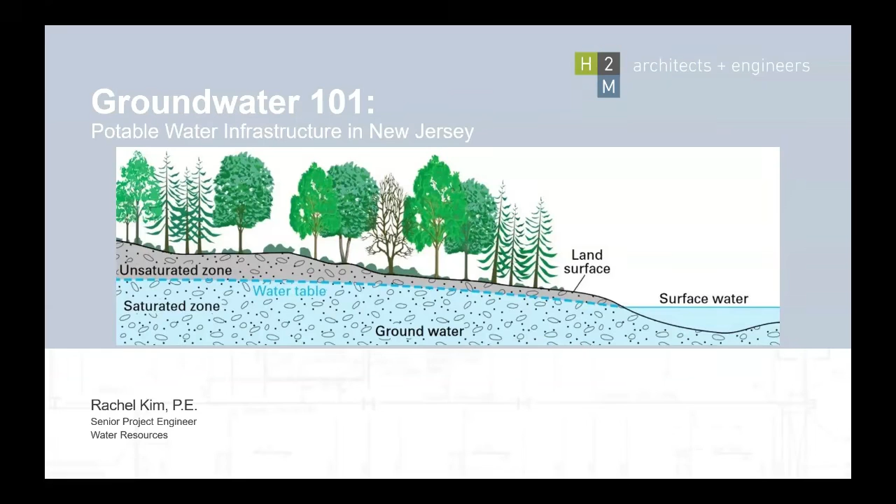So today, the topic I'll be sharing on is Groundwater 101, and we'll be diving into potable water infrastructure specific to New Jersey. And if any questions arise, please feel free to stop me as you need. Yeah, we typically do a Q&A right after you are done. Okay, yeah. That's great too.

Okay. So just a little bit about myself. I went to Cornell, where I got my BS in civil and environmental engineering with minors in engineering management and architecture. Like Joe mentioned, I actually did start off as an architecture major. That's what this little dragon on the bottom of the screen is.

The freshman architects build a dragon and then march it down the main road through campus the Friday before spring break. And then we brought it to the arts quad where we set it on fire and danced around it. This included the architecture upperclassmen who are usually wearing weird little costumes that they make. And then the engineers retaliate by building a phoenix to battle the dragon.

And this all originates back to the early 1900s when there was a student who thought that there should be a College of Architecture day, and he led the students around campus with a model dragon, and the lore was that it was partly inspired by St. Patrick driving the snakes out of Ireland, and this is still an active tradition on campus. It happened earlier this year in March, and I'm sure they'll do it again next semester. I don't think they set the dragon on fire anymore, probably because of safety stuff.

Pretty weird tradition. But like Joe mentioned, it turns out architecture really wasn't for me, and I ended up transferring to the engineering school my sophomore year. So throughout college, I interned with a geotechnical contracting firm called Moretrench, and I ultimately went to work there full-time after graduating. I was with that firm for about 12 years, working in deep foundations, ground improvement, and construction dewatering design.

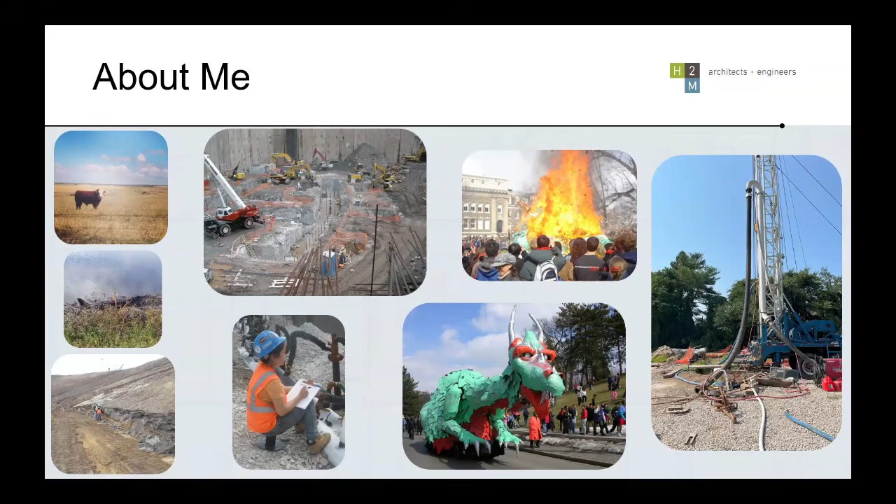So the photo on the right is the only kind of current photo. It's actually pretty recent. It's from a potable water well installation for the South Huntington Water District in Long Island from last summer.

So just a little bit more about H2M. It's an architecture and engineering consulting firm. Like Joe mentioned, I work in our Parsippany office. The water resources team in our office is now almost 20 people at this point, which is pretty exciting because when I started in 2020, there were only 6 of us.

We're full services, so we offer everything that you need to design a structure because we have many different expertise in-house that can help with everything from land use constraints and permitting, HVAC systems, plumbing for a building. We have structural engineers, electrical engineers. We do drinking water and wastewater. We have surveyors, landscape architects. We have environmental teams and then forensic teams that evaluate structures for asbestos or do fire investigations.

We have construction inspectors who we deploy once projects are actually in the construction stages. And it's great for me because I get to learn a lot from these various departments, but then conveniently I can pass off all of the tasks that I don't have the skill set to be able to perform.

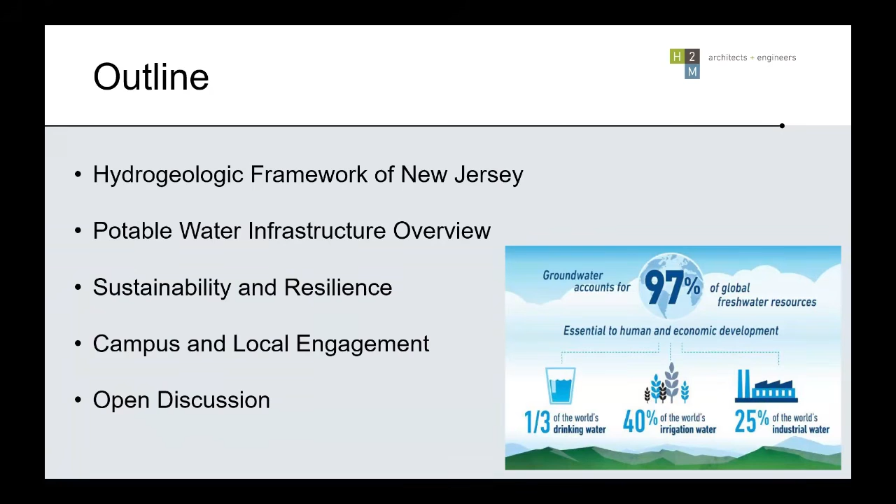So I'm sure you're all familiar with the water cycle. I feel like this general concept is introduced to us all in grammar school, but we'll dive a little bit deeper without getting too cerebral unless there's interest, I guess. But the basic concepts are extraction and recharge.

So we in civilization use wells and surface water as sources of water. Animals also drink from surface sources. Plants absorb water from the ground. And those are all kind of extraction points. And then for recharge, the primary source is typically precipitation. As water precipitates, it'll fill surface water bodies, percolate through the ground, and replenish aquifers.

What's an aquifer? An aquifer is just a naturally occurring underground layer of saturated permeable material. Permeability refers to a soil formation's ability to transmit water. So coarse sand and gravel aquifers tend to store and move the most water. Bedrock aquifers rely on fractures to transmit water and can be productive, but they do tend to have less capacity as compared to sand and gravel.

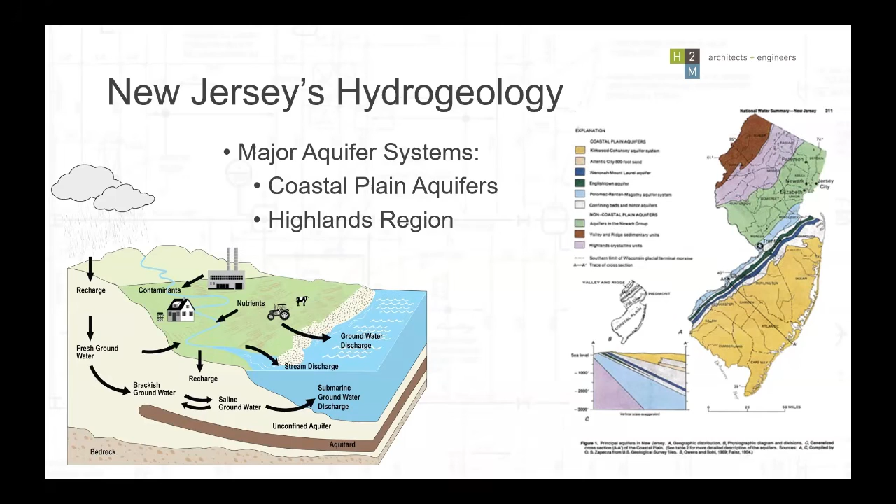And then areas without planting or forest cover also lose a lot more water to evaporation. So for example, I would think of wealthy neighborhoods where each parcel is kind of humongous and there's just a singular little McMansion in the middle, and then the rest of the property is just a giant lawn. The precipitation hitting those areas is recharging the area that the water is being extracted from, but it's evaporating a lot more quickly. For me, I think lawns are one of the worst things to have happen to the environment.

Next, there's aquifer storage, which is related to pore space. A high porosity aquifer has more potential storage. So if you think about coarser, looser soil layers with larger pore space between each granule, that's increased volume for water to occupy. If you have very dense soils that are well graded, so you have small grains filling in the space between big grains, you'll have less room for water to be moving freely through that pore space.

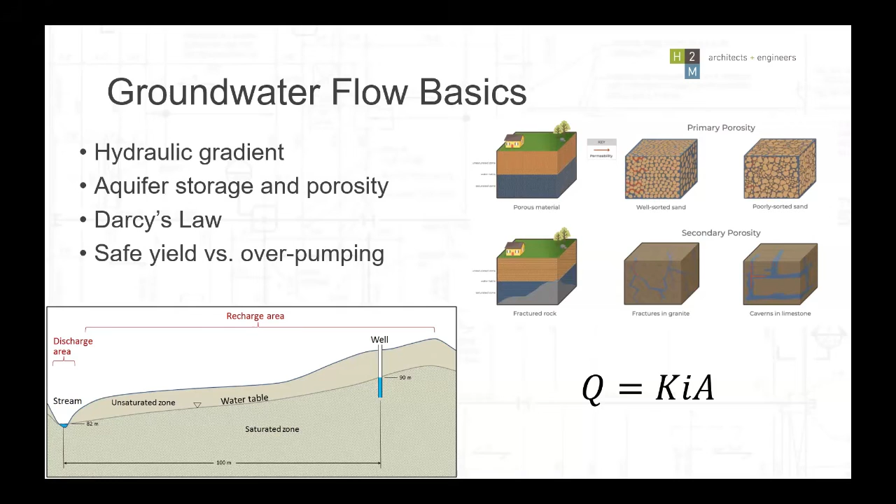Depending on water quality, there will be a level of treatment that's needed. Typically, at a minimum, we implement disinfection. That's usually done with chlorine. We have one client that still uses gaseous chlorine. Very interesting to me because it's so incredibly dangerous, but it's actually one of the most efficient ways to chlorinate and disinfect your water. You can also do UV disinfection. There's a few different methods.

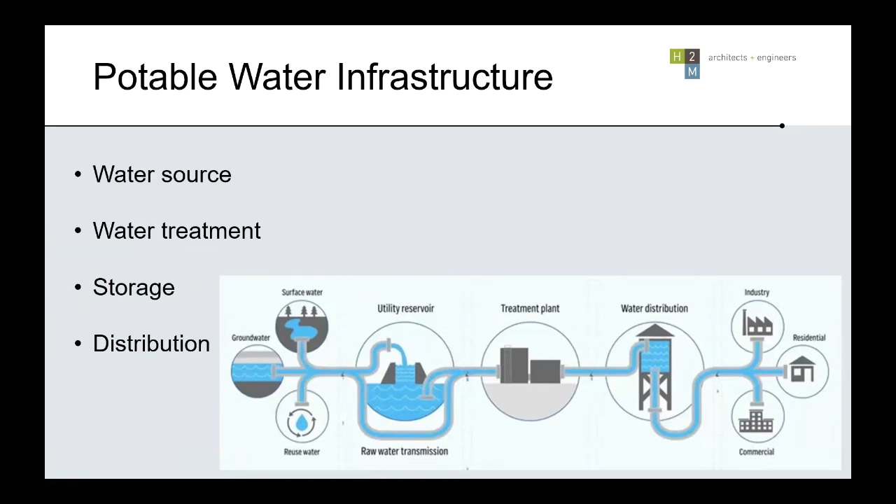We have new technologies that can test for these things. We're finding out about health effects of different exposures of contaminants we used to not understand before. And health authorities are beginning to regulate more and more treatment requirements to deem our water safe for public consumption.

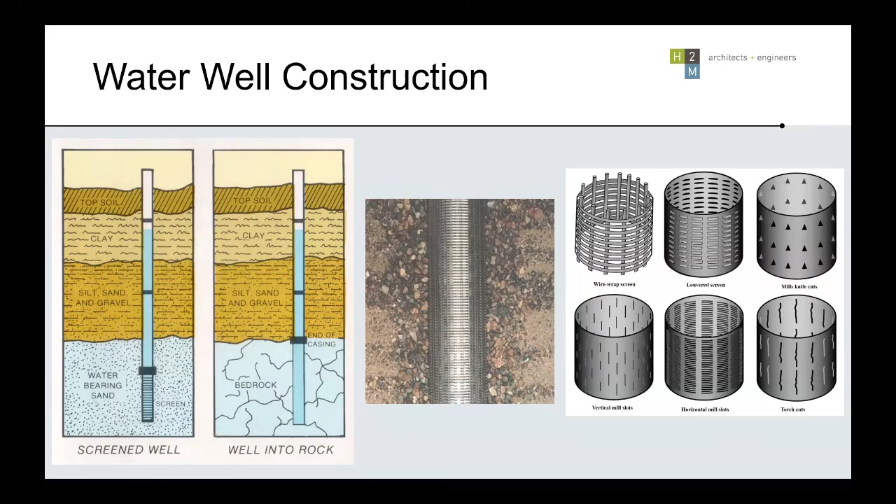The DEP actually regulates groundwater wells based on the density of wells in an area, as well as the aquifer capacity. They also take into consideration other environmental factors like sensitive habitats for animals, or things like proximity to wetlands, because you don't want to draw down the water so much that you're now negatively affecting the environment. And then if you happen to be a resident with a private well that's maybe on the shallower side, and then you end up surrounded by a bunch of larger municipal wells, the municipal wells might lower the water table enough that your private well runs dry.

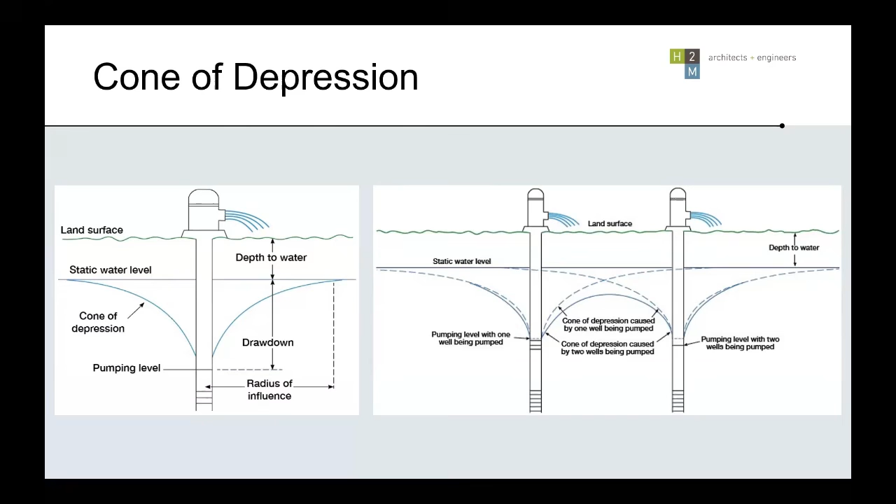And then a good segue from moving plumes into contamination and emerging issues. There are two main categories when it comes to drinking water contamination, at least from a regulatory standpoint. Primary contaminants are substances with direct negative health impacts and are subject to legally enforceable standards, which we call MCLs, or maximum contaminant levels, that are in place to protect public health.

And then secondary contaminants are non-enforceable aesthetic factors like taste and smell and color. These are, again, non-enforceable guidelines, but this is also the category that will generate the most customer complaints. So it's always in a water purveyor's best interest to address both. The primary contaminants they have to legally handle, and the secondary they should want to take care of so that they're not getting angry service calls all the time.

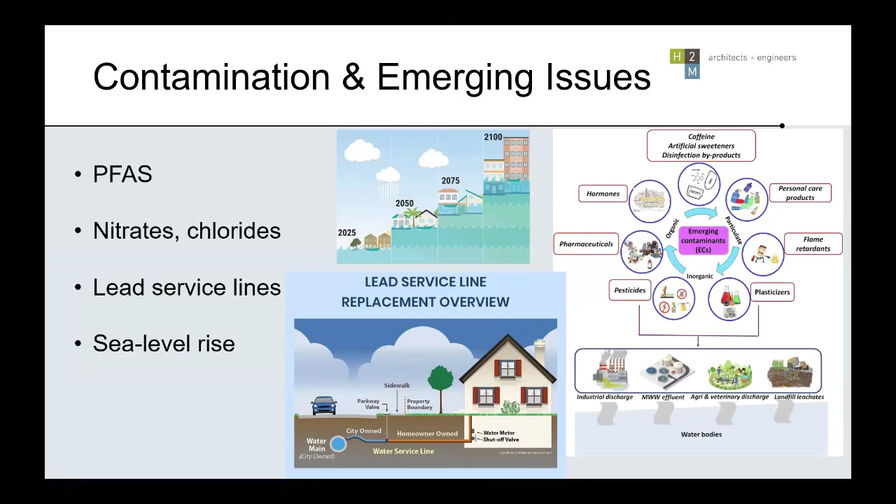So tying this back to sustainability and resiliency, there are a few different strategies to helping protect our most precious resource, and I'll share a few of my thoughts. So infrastructure investment is one of the top things, I think. Like any other piece of civil infrastructure, like our roads and bridges, wells also require regular maintenance and upkeep and eventual replacement. Water purveyors need to be monitoring their wells for the static water levels, pumping water levels, pumpage, which is just the volume of water that they're extracting, and evaluating whether the efficiency of a well is declining over time, so that if it is, they can rehabilitate the well to restore its capacity and lengthen its lifespan, and just maintaining the health of their infrastructure.

And then they may also be able to make adjustments on how much they're pumping, going back to the concept of safe yield versus overpumping. And then resource planning, again, well capacities need to be established such that they're not overdrawing from the aquifer. And then we as customers can help reduce the need for excess pumpage by decreasing water usage. Again, like harkening back to the stuff that you learned in 3rd grade about how not to waste water.

Like nothing irritates me more than an irrigation system, period. I already said it, Americans' love for their lawns is kind of lost on me. But particularly seeing an irrigation system running while it's raining is like infuriating. I feel like that happens in my neighborhood all the time.

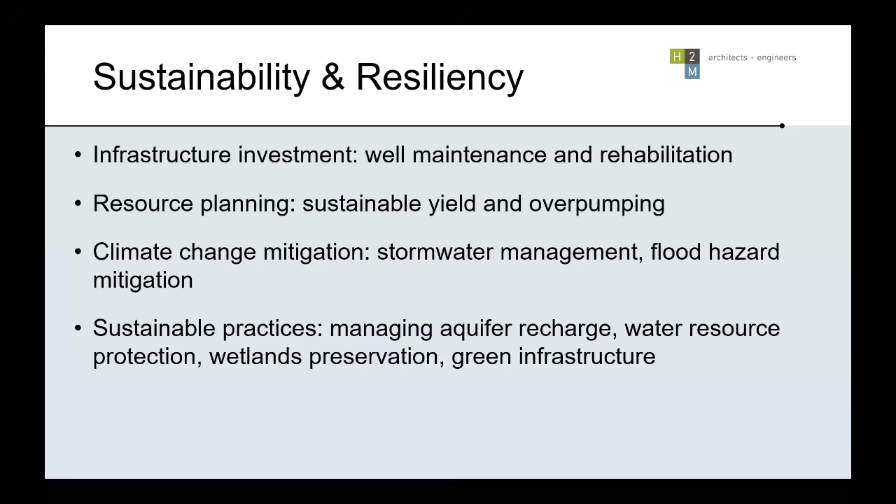And then last bullet, sustainable practices. Each of these examples that I list kind of just tie back to the 3 bullets above.

So there is a governmental regulatory framework in place to monitor water usage as well. In New Jersey, water purveyors need to have what they call a water allocation permit if they are pumping greater than 70 GPM, or the equivalent is 100,000 gallons per day from their system. So the water allocation permit is actually really extensive. The DEP is very strict about allowing water purveyors to extract water from aquifers, and it can take years to receive approval anytime that you're applying for one of these. And then the state will regulate total annual pumpage.

You have to report what you're pumping every year. And there might be monthly limits and daily limits, and then even instantaneous limits where the state will say you can't install a pump in a well that can pump higher than whatever cap they decided to put on your well because of what they know about the aquifer.

And then there's like a slew of compliance related responsibilities with having a water allocation permit, including water quality sampling. There's things you have to test for on regular intervals. Some things are more often than others. Right now with PFAS being so common, that's, I believe, on like a quarterly cycle. Things like total coliform and fecal coliform, you might have to test for on a monthly rate. And it might depend on your system too. If your system has proven that it's very reliable for not having radionuclides, then you might not have to test except for every 6 years.

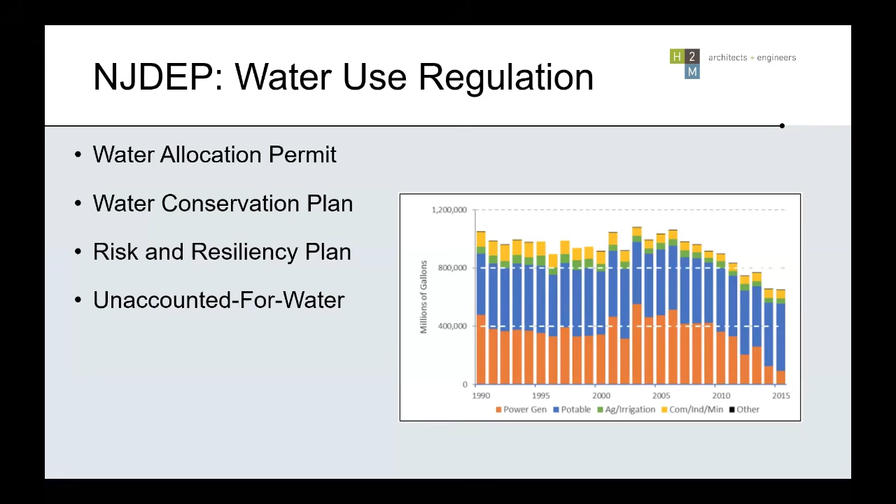The unaccounted for water sometimes exists because of things like non-metered use, like firefighting. But a lot of the times the delta exists because there's leaks in your distribution system or your water meters are inaccurate. So the DEP has requirements for how often you have to calibrate your meters and how much you're documenting all of this data, because the goal is to minimize the waste of water as much as possible.

Managed aquifer recharge is a concept used to restore depleted groundwater levels, and you can also use it to prevent migration of saltwater intrusion in coastal areas. So recharge activities are conducted to increase water availability and mitigate the effects of groundwater overexploitation, because we're pumping so much out of the ground. If we're able to add a little bit more in addition to the naturally occurring precipitation, that's probably ideal.

So managing natural storage can include seasonal storage of water during times of high availability, like during the rainy season in spring and autumn, and then making that available for periods of high demand, like in the summer dry season when people are filling their swimming pools and watering their lawns and gardens more often. And then long-term storage or water banking can be a strategic measure for more sustainable management of groundwater resources.

And this concept is particularly important in cases where your source water and the usage area don't occupy the same geography. So I'm coming back to that watershed idea again. There is actually quite a...

Rachel, you have 5 minutes. Okay, sorry. I think I only have one more slide. Okay.

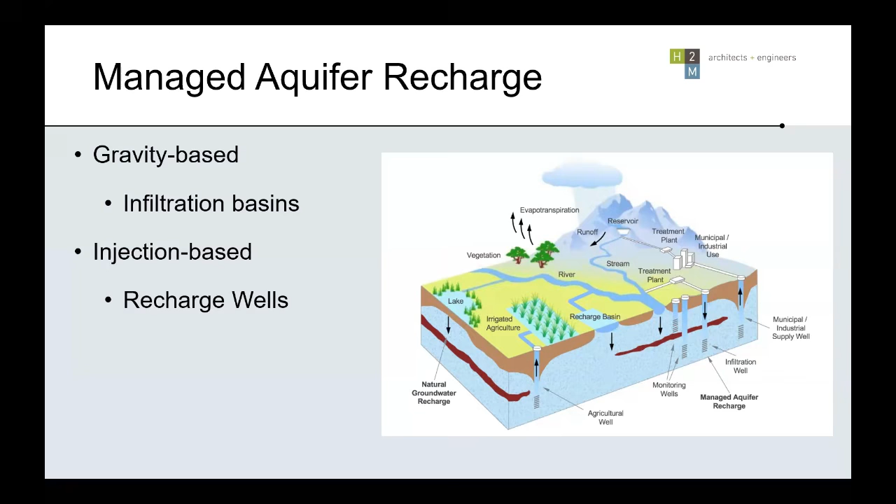So there's the concept of water mining that occurs even in New Jersey. For example, the Boonton Reservoir, located between Boonton and Parsippany, supplies Jersey City. So if someone in Jersey City is watering their lawn and that excess is percolating into the aquifer below Jersey City, it's not coming back to the Boonton Reservoir, which it was originally pumped from. So managed aquifer recharge is likely going to be a critical tool in the future of groundwater resource management.

I've also been reading that Hoboken has been installing rain gardens and bioswales and doing street redesigns to address stormwater management. And I was also reading about a resiliency park where they built an underground cistern and also have surface water storage to help manage all of the excess stormwater runoff that is occurring.

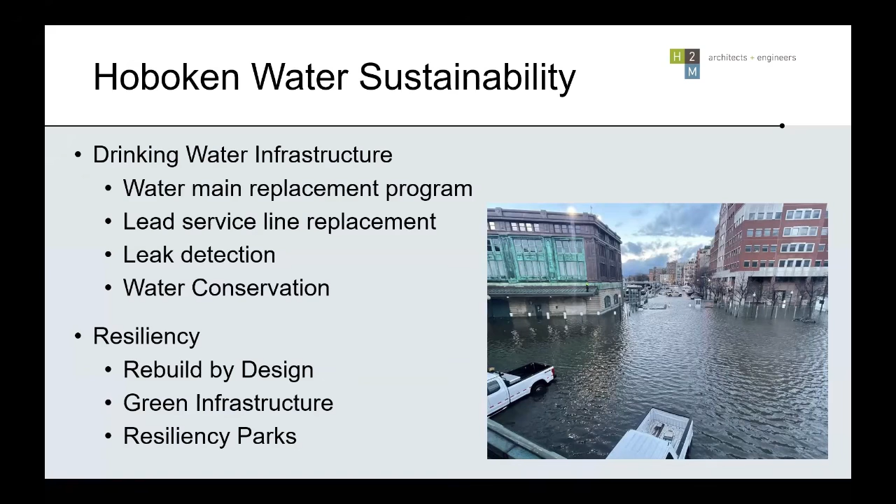And then our final slide, what can we actually do as individuals? You can look into learning more about your own watershed. I've been talking about watersheds a lot. You can use GeoWeb. It's an ArcGIS database that the DEP hosts that has a ton of data on it. So you can look up your watershed there. There's also info about contaminated sites and sensitive species habitats and geology and whatnot.

And then something that I am pretty passionate about is advocating for equity in water access. Water is a human right. Water equity just means that everyone has access to safe, reliable, and affordable water, regardless of their income or location. We need to identify gaps in equitable infrastructure, recognizing that millions of people lack access to clean drinking water because of aging infrastructure and climate change, and there not being enough funding in poor communities. So just making sure that we all have that same access, regardless of our financial positions.

And then maybe someday our infrastructure will be such that we're not using this high quality, expensively treated potable drinking water for things like irrigation or fighting fires. Maybe we'll need to explore gray water reuse or stormwater capture, and even, this is kind of a controversial topic, beneficial reuse of wastewater. Maybe we can use that to fill our toilet tanks instead of using drinking water for our toilets, and thinking that that might be part of the future of water.